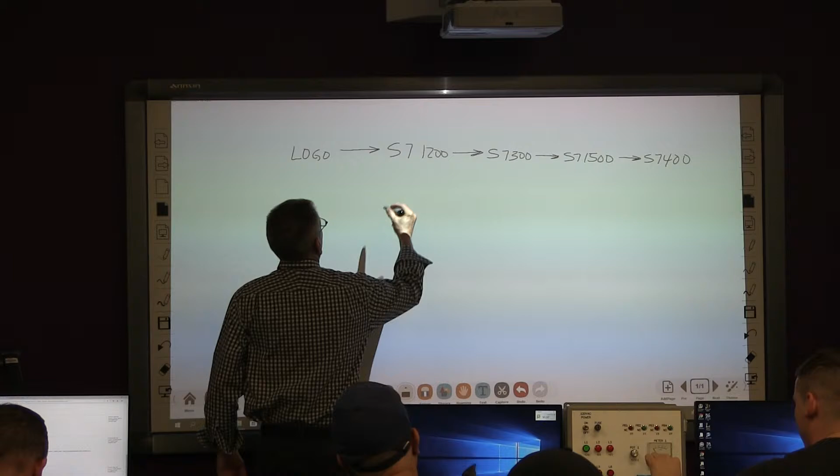But in the Siemens family of PLCs, the S7-1200 and the S7-1500 are the newer ones, and the S7-1500 is becoming the workhorse of the factory these days.

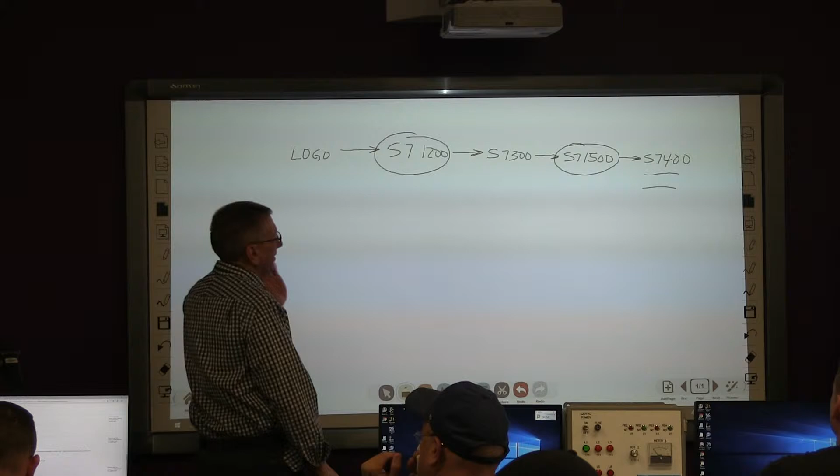What do you guys use, Josh? Probably 300s, I don't know. That's older. That would make sense, 400s are more for huge assembly lines and data, beautiful graphic HMI. Yes, a 50-inch HMI, TV screen for an HMI. But the S7-1200, that's what we're using here. That's the one we're going to be using here.

It's kind of fixed, but it's modular too, because we can add like 8 modules into this thing. Just so you understand, the logo is more developed for small machine type stuff. S7-1200 is probably for a small assembly line, I would think. There's still a lot of capabilities there, and then it gets on up into the other stuff.

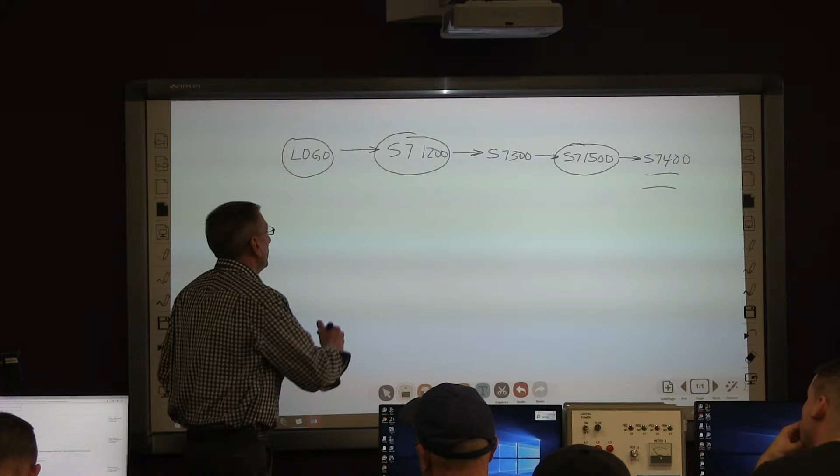The software that we use for programming, let me go back a ways, because some of you BMW guys are probably familiar with Step 7, or at least you've heard the name. Step 7 is a legacy software that Siemens used, and there's still a lot of places that use it out there. That is a PLC programming software. I can't zoom in and get it up to see what it is.

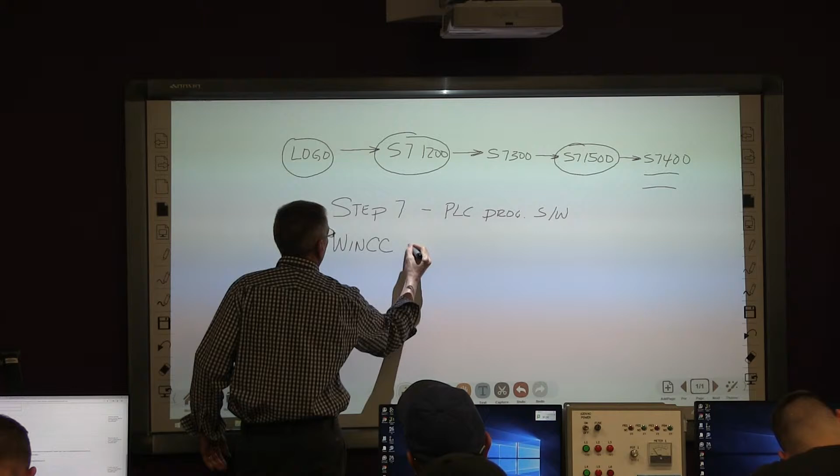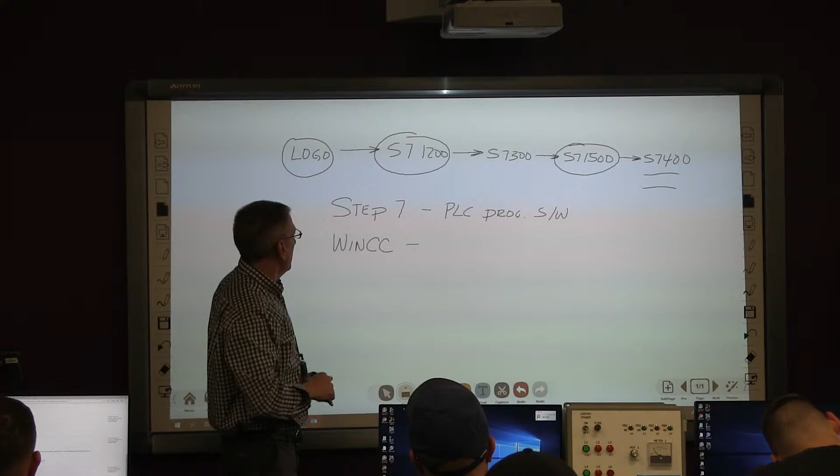And then there's something called WinCC. Has anybody heard of that? Yep, I've heard of that. It seems to not pertain to S7-400s? Okay, that makes sense. Yeah, WinCC software, that's for all the HMI. That's the HMI programming software.

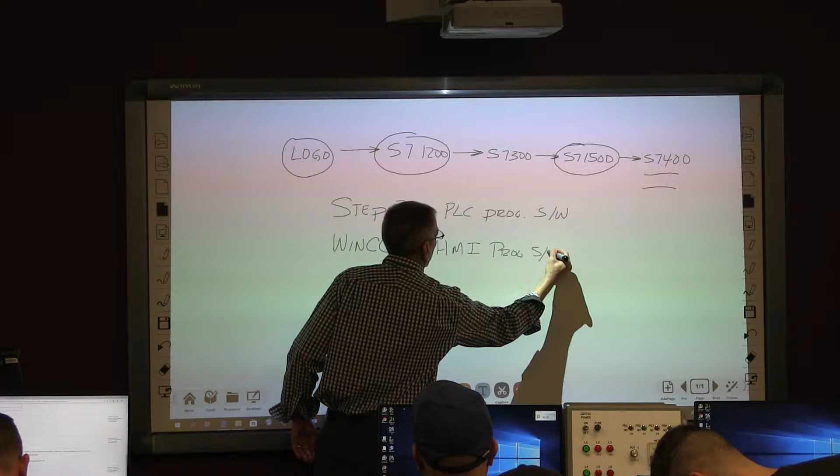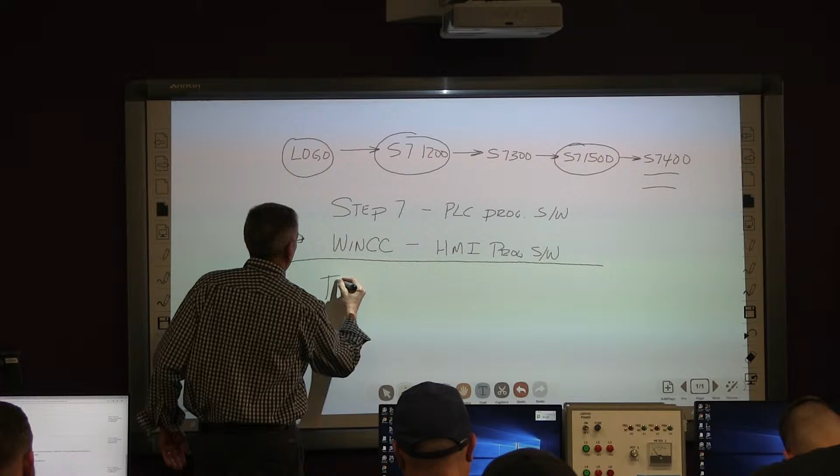So what we're using is TIA Portal, Totally Integrated Automation, or whatever that was. What TIA Portal does is it combines these two, basically taking Step 7 and WinCC and putting it in a nice package. Although it hasn't been updated a lot, it's a lot more user friendly.

What do you guys use? What's the newest one? There's TIA Portal, and then there's something else. Are they still teaching TIA Portal? That's all the new classes. Okay, TIA Portal. Unless they changed something in the past month, but that's what they would be doing.

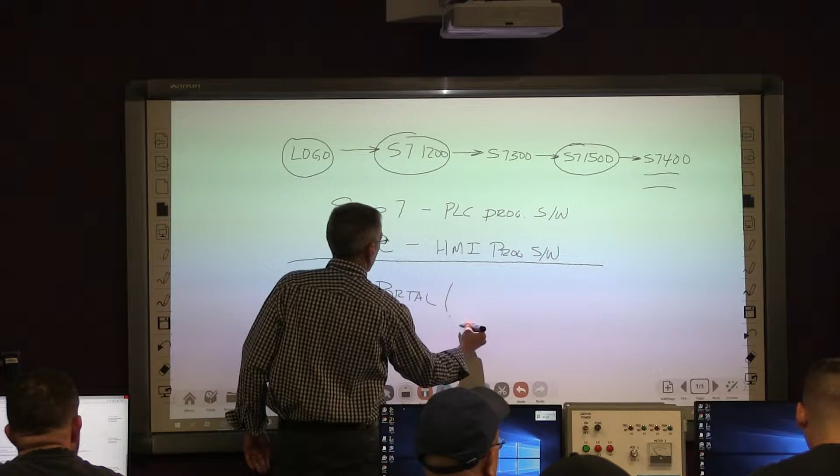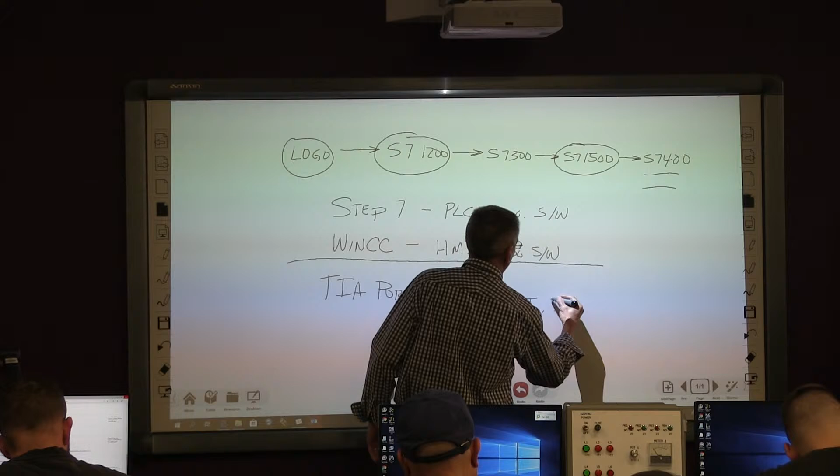Okay, well that's good. So TIA Portal, Totally Integrated Automation, is for the PLC, it's for the HMI, and it also involves programming for drives, for any Siemens drive, just to give you an idea.

This is like Studio 5000. Studio 5000 has the PLC programming software built in and the HMI stuff also, the FactoryTalk, but it's kind of clunky, same way with TIA Portal. TIA Portal does a little bit better job of integrating them all together, but still.

And I will tell you this, I am by no means a Siemens expert. We're going to learn together, that's it. But I will tell you this, once you get out of this class, you will know more than the normal maintenance guy about this stuff. I can tell you that.

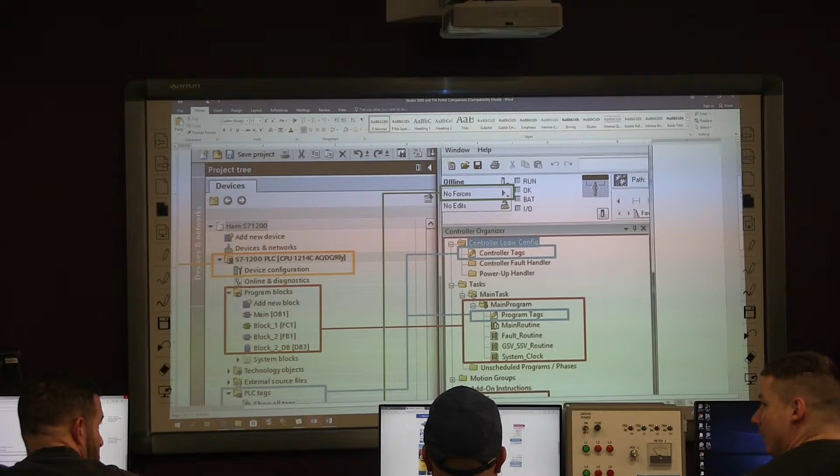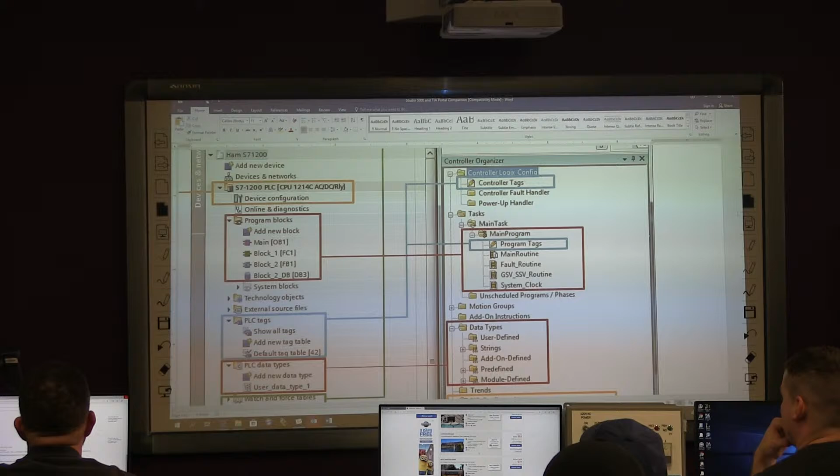They pay a little extra for it, plus they get the guarantee. Just support it, yeah, they pay a little extra money. Everything signed off. No, I had good training on that. I mean, when you're spending that much, you gotta keep your reputation.

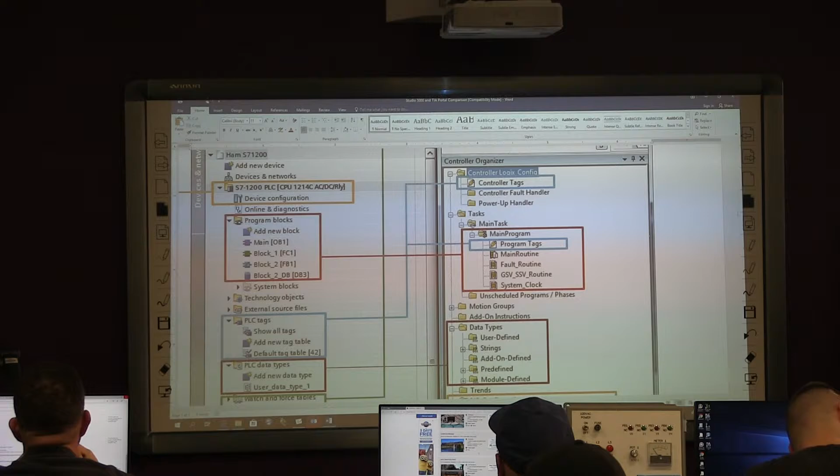So here's kind of a comparison of the two. Studio 5000's on the right, TIA Portal's on the left. If you look, let's take a look at the I/O configuration. You got this on the PLC.

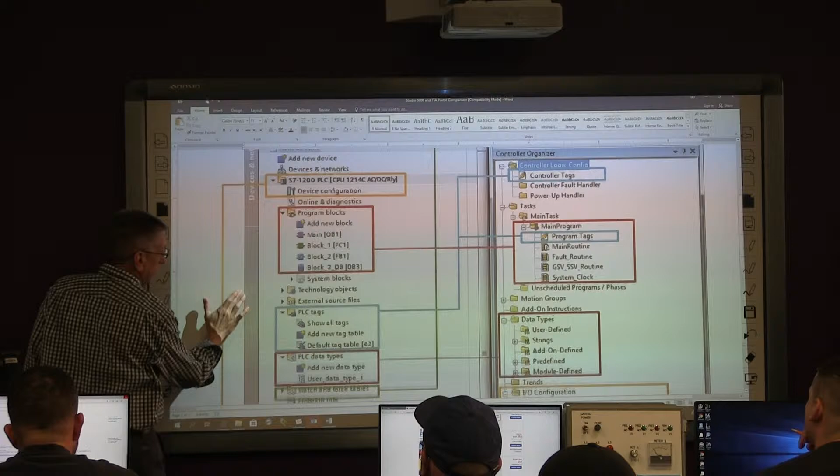Here's all the I/O configuration in Siemens. You got the PLC, and then you have digital input, digital output, and so on. Kind of the same thing over here, CompactLogix.

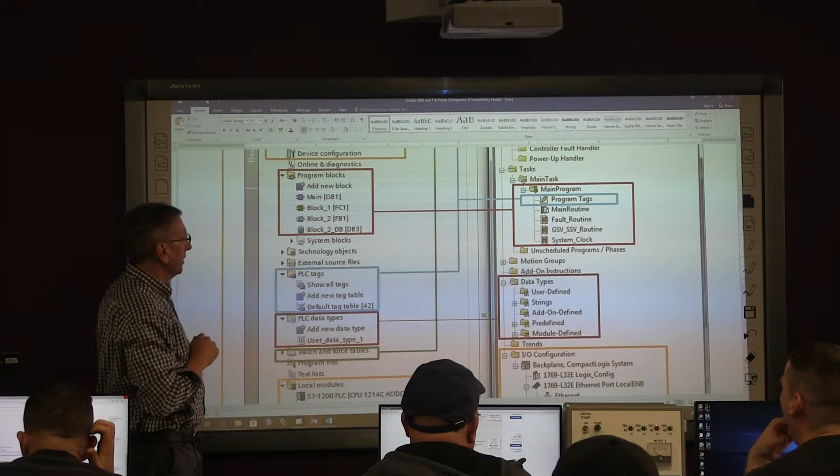One of the big differences in Siemens is they use code blocks. It's just a word, a buzzword, a Siemens buzzword. But we can compare that to the subroutines, the main routine and the subroutine.

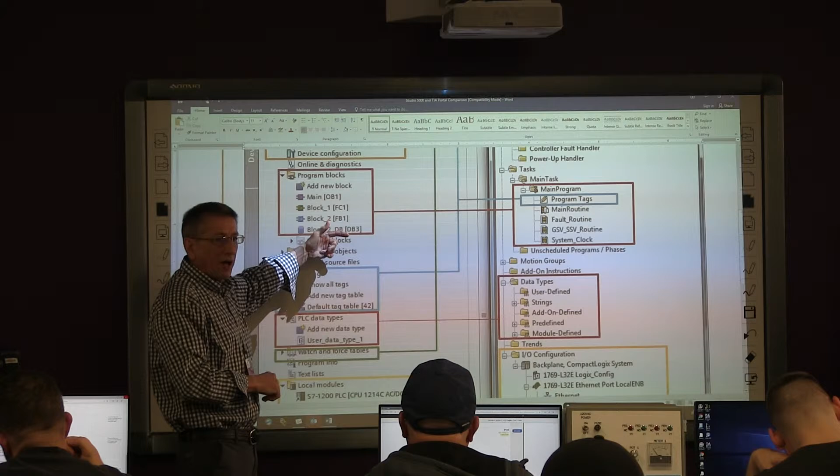In Siemens, main OB1 is the main routine. Block 1, FC1 functions are subroutines, subroutines without memory. FB's, function blocks, are subroutines with memory. This will all come clear later on once we get into it. And then we have something called a DB, a data block, and that's where all the data is stored for the function blocks. That's how function blocks retain the memory in this thing called a data block.

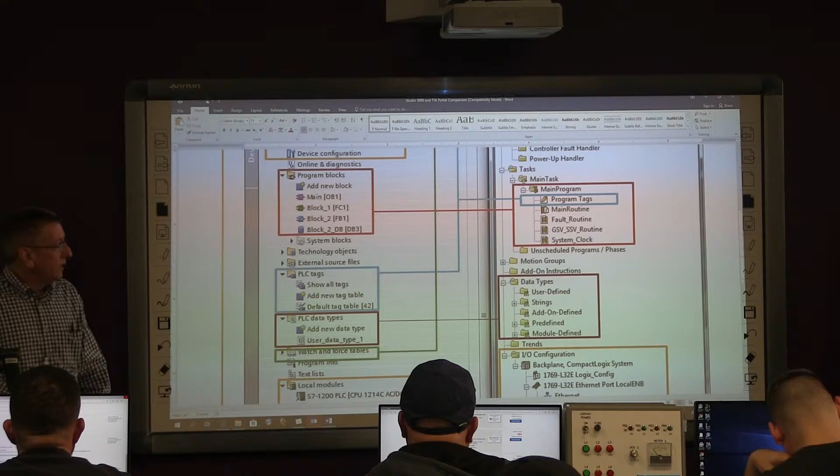Nothing over the top. And in Siemens we have tag tables. PLC tags are the controller tags. So all the PLC tags are controller tags. What's the scope of PLC tags? Global, that's right. So PLC tags are global.

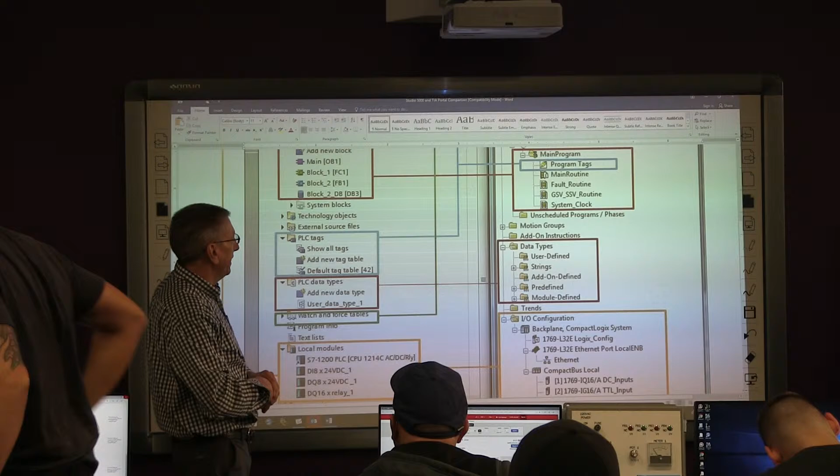And the program tags in Siemens are called local tags. There's not what you would call a local tag table in the project, but that's created in your program blocks, code blocks, the local tag table. It's just like when we do different programs. Remember Allen Bradley, we have multiple programs. We stayed in only one program, the main program.

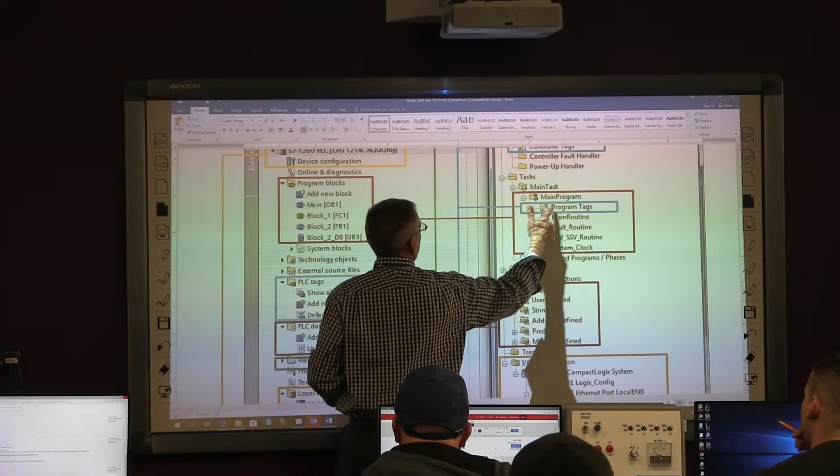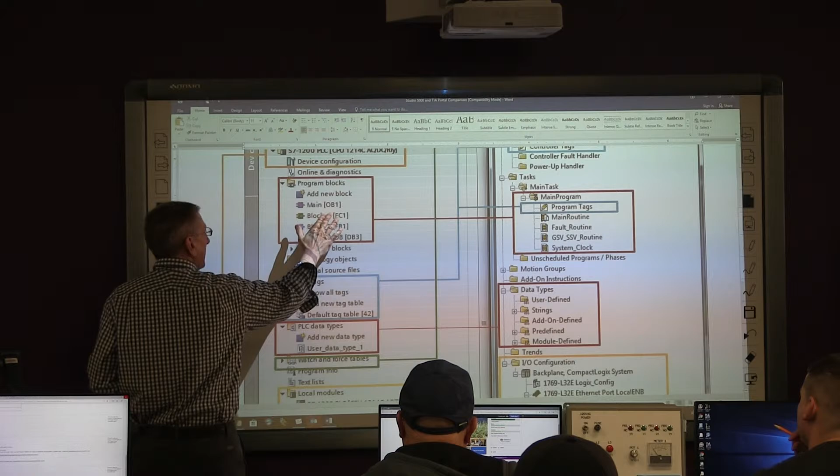But we can have multiple programs with multiple tag tables. It's just like, okay, program tags, we stayed in the main program. It's the same thing over here, except if we create local tags in Siemens, the local tag table is actually internal to the blocks. Not a whole lot of difference.

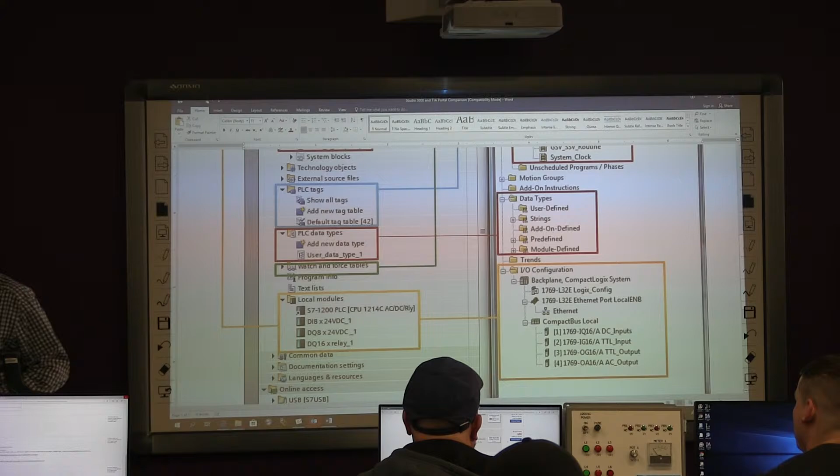To give you an idea, here is a list of the Siemens data types. This is in the book. I made a note up there, Stenerson, page 45. And I'm going to tell you about this easy book here too, in just a minute. There's something called an easy book.

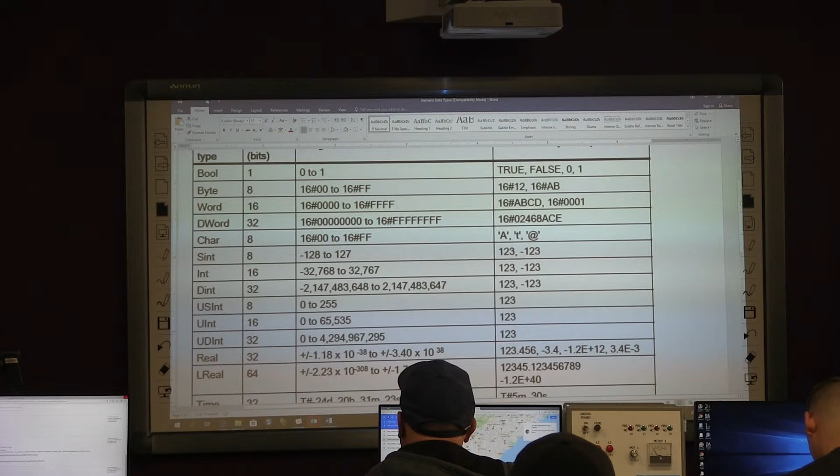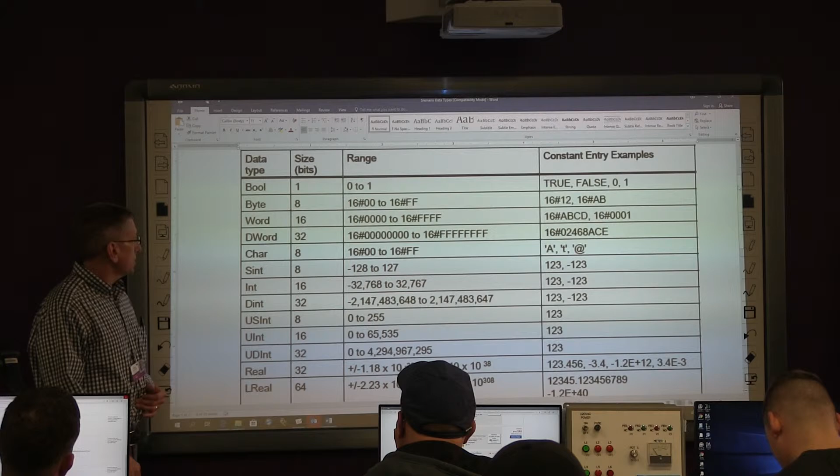It's like a quick start guide, or Siemens for dummies, whatever. So here's all the data types that Siemens use. And I would venture to guess that this is not the complete set of data types. Bool, byte, word, double word, character, single integer, integer, double integer, unsigned, single integer. Look at the unsigned data types.

What's the difference between the unsigned data types? Unsigned single integer, unsigned integer, unsigned double integer, and the regular data types. What's the difference between the two? One's unipolar, one's bipolar. Yep, that's exactly right. So the unsigned data types only go in the positive direction.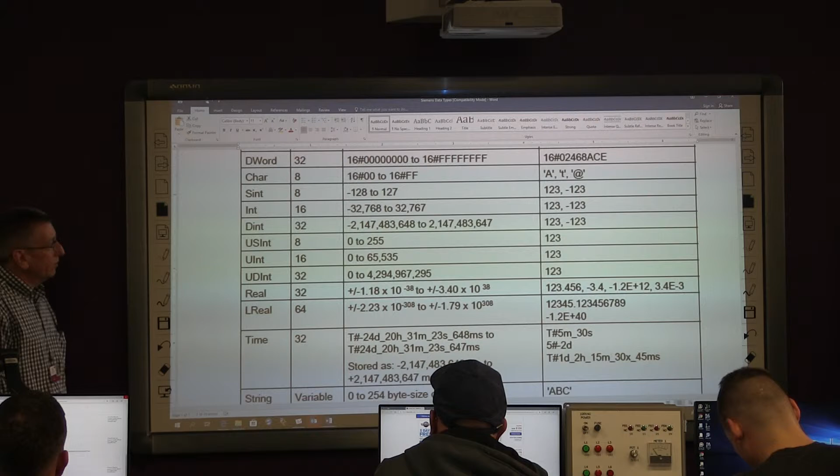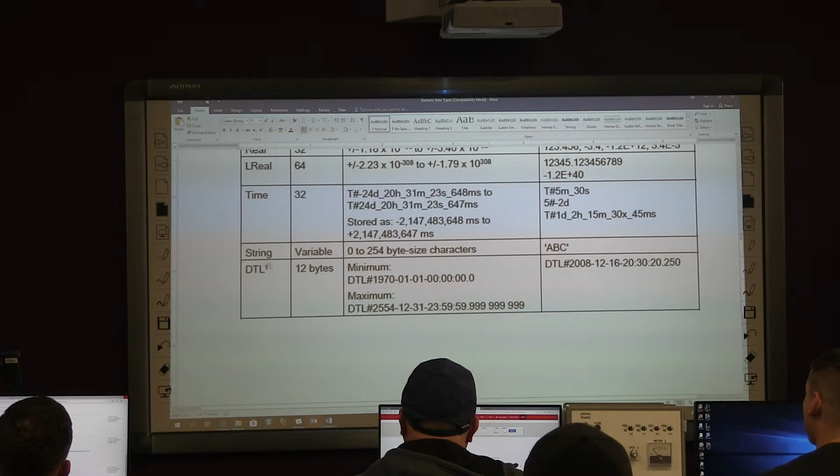And of course we have real, long real. Siemens uses this time data type for like a clock, any kind of real world clock stuff. String, date, time, long, so on, just to give you an idea.

So very, very similar to Allen Bradley. One of the main differences with Siemens is addressing. The tags are addressed at a byte level, so we use byte addressing. Instead of word addressing, we use byte addressing.

So just to give you an example, let's say we have a 16-point input module. What's 16 point mean? It has 16 points for you. That's 16 inputs, right? Yeah, 16 inputs.

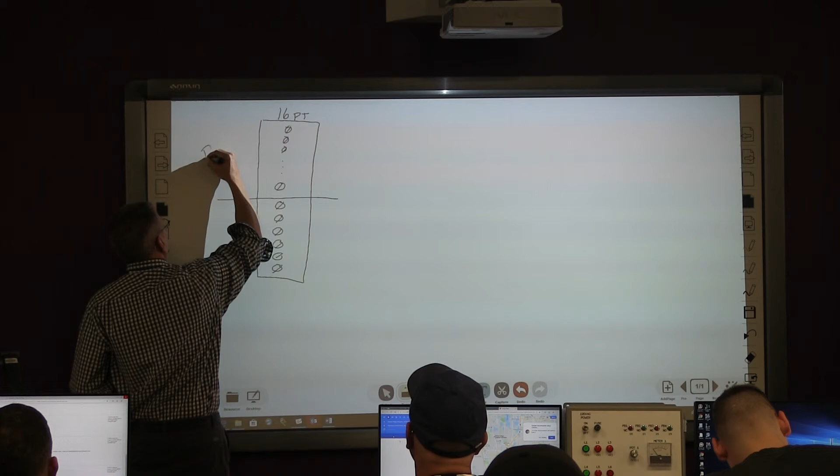In the Siemens world, this module is broken down into separate bytes. And if this is in the first slot, this will be byte 0. The first 8 inputs is byte 0. The second set of inputs, what byte number is that? Byte 1.

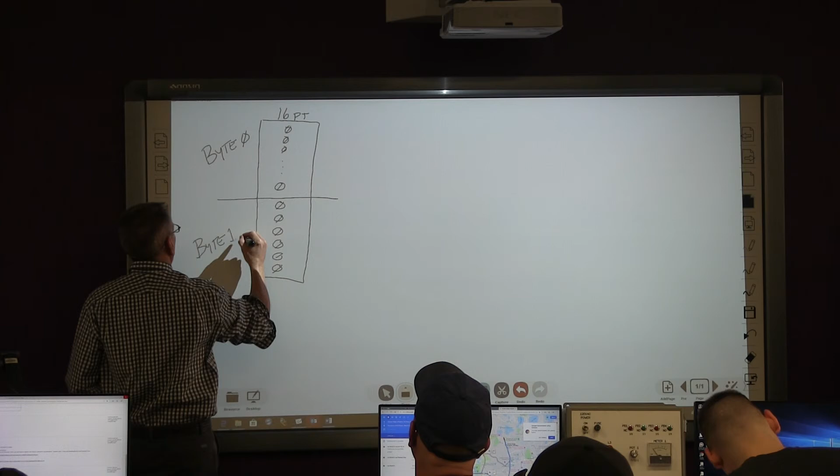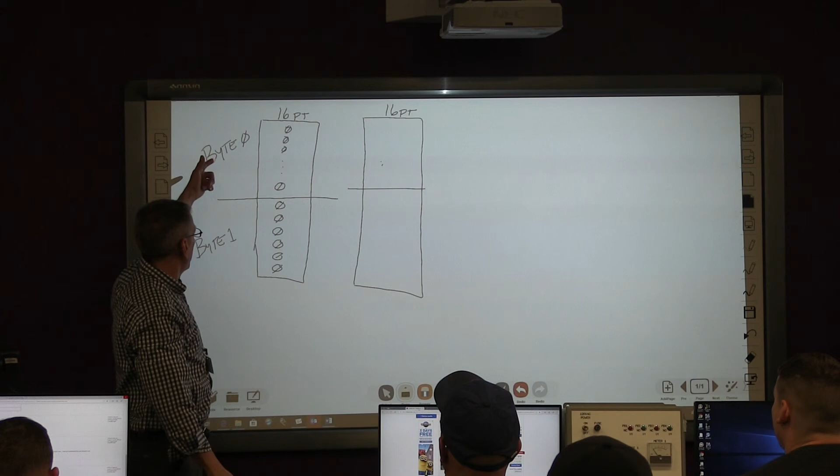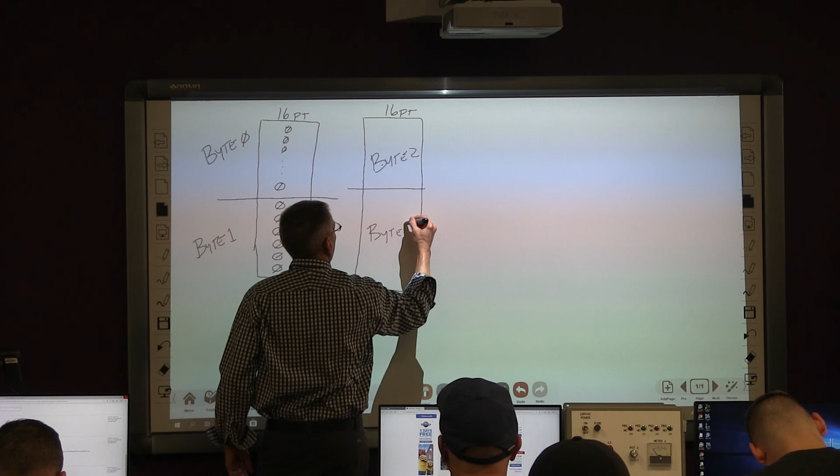And then we're going to do some addressing here in just a second, but I'm going to add another module in, sitting right next to this one, another 16-point module. What's the first byte in this one? Byte 2. Yes, so there's byte 2, and byte 3, and so on. That's how we address in Siemens, instead of by slot number, by byte.

Let's go through some examples of addressing. So we said this was a 16-point input module.